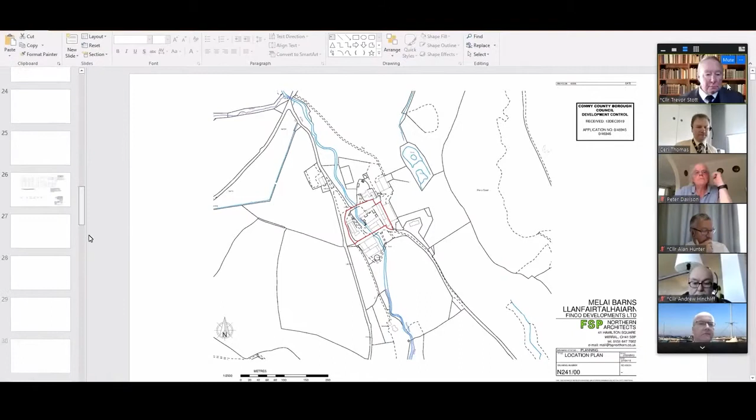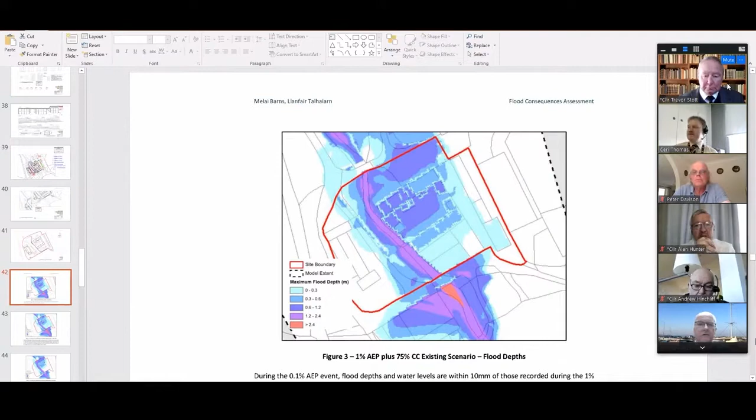Just to remind you, those mitigation measures would include constructing a flood wall along the right boundary of the stream. They would involve a slight increase in ground levels where the southeast access is required, and they would also include carrying out works to the bridge. Now, the works within the site could be secured by condition. However, the works to the bridge are outside the area of the planning application. They are not matters which can be essentially conditioned as part of this permission. They would require a separate permission from the council, and they would also need to be subject to the agreement of the highway authority. So there is some doubt as to whether the mitigation measures proposed in the flood consequences assessment can be achieved in their entirety.

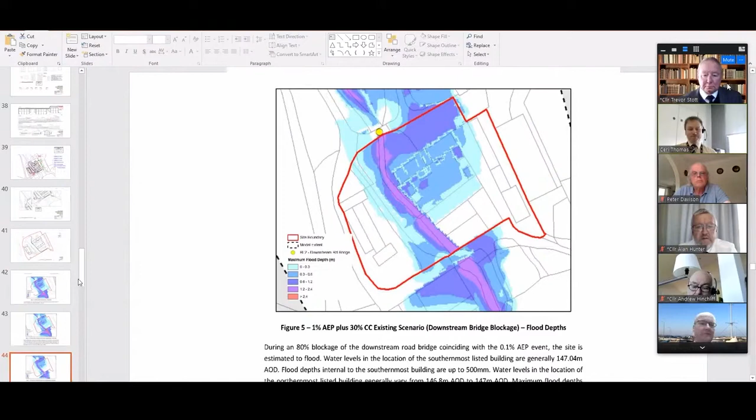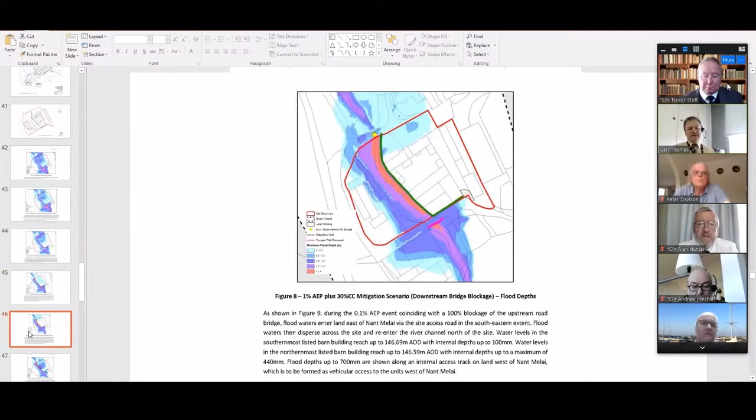If you could go to the next slide, please. This shows a similar situation, but with a blockage downstream of the bridge, again with the mitigation measures in place. In this case, there would be a lesser extent of flood risk. I'll just ask Julia to go to the next slide, please.

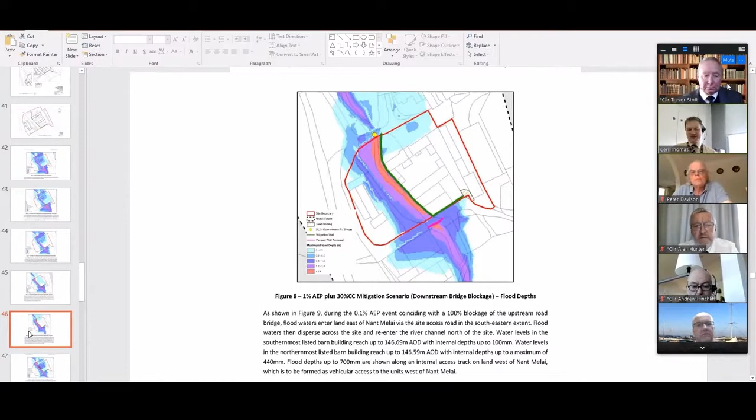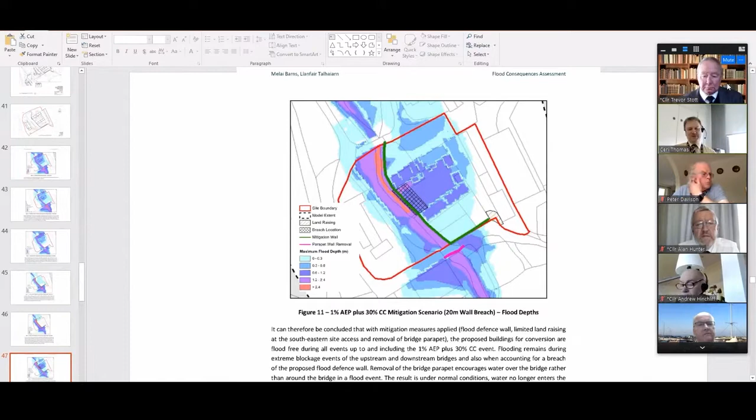We cannot recommend that the works on the bridge are secured by a Grampian condition, because the policy test for a Grampian condition is that we must be satisfied that there is at least a reasonable prospect that the works will be carried out before the rest of the planning permission can be implemented. And we're not in a position where we have that degree of confidence.

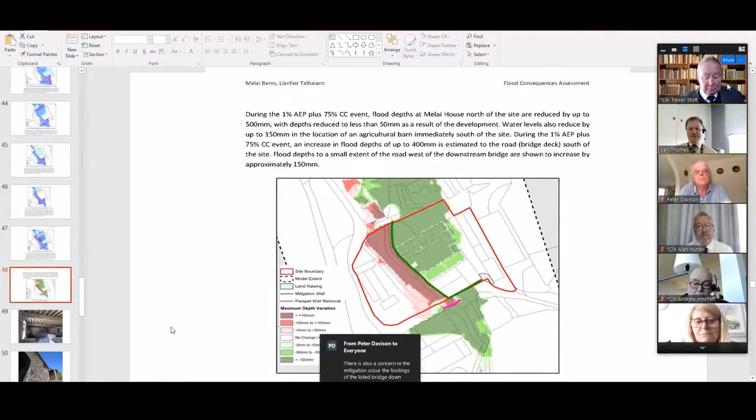This is a gem of a site, granted, and it's a lovely old building. But as if you're going to buy a house, what do they say? Location, location, location. If you're into water features, this would be ideal because you'd be in one for most of, for a better use of a word, I was there on the 9th of February last year in 3-4 foot of water, trying to help Mr. and Mrs. Williams, who live just the other side of this farm.

When this farm was sold, the house was sold separate to the buildings, and they've been trying to develop it. I think it was given consent prior to TAN 15 being implemented in 2012 for 6. Now that would have probably been developed, but they would have been flooded by now. This site will always flood, unless we're going to redirect the river, and I can't see anyone doing that soon. What mitigation they've put in place on the hydraulic modelling would work temporarily, but it will always flood.

And what hasn't been considered in these hydraulic assessments is also the water that comes off the mountain called Moel Unben down the Barog direction as well. The Barog being the catchment area that comes down, but more or less behind Colomendi, Peter Davison's property. So we have that problem with water always going to flood it.

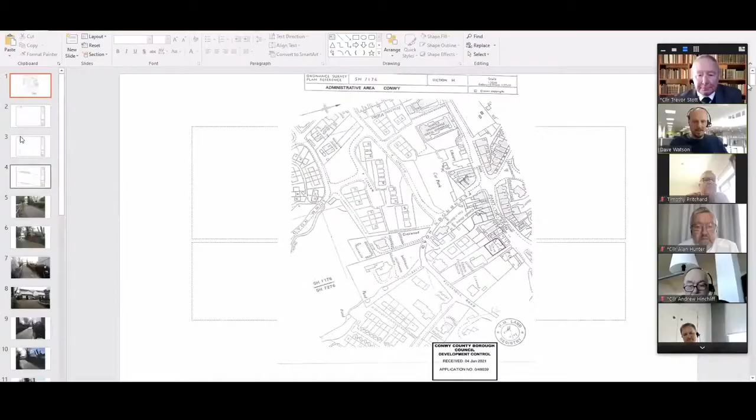That's the existing site plan, layout plan without the access. It shows trees 1, 2 and 3 alongside what is the eastern boundary of the site, but it's actually the bottom of the drawing that's shown there.

The next slide, please. This is the proposed site layout, which shows the driveway, parking area and the new access. Tree T3 would be the tree that would be removed, it's a sycamore tree. Just to remind members that the tree officer doesn't object to that tree removal.

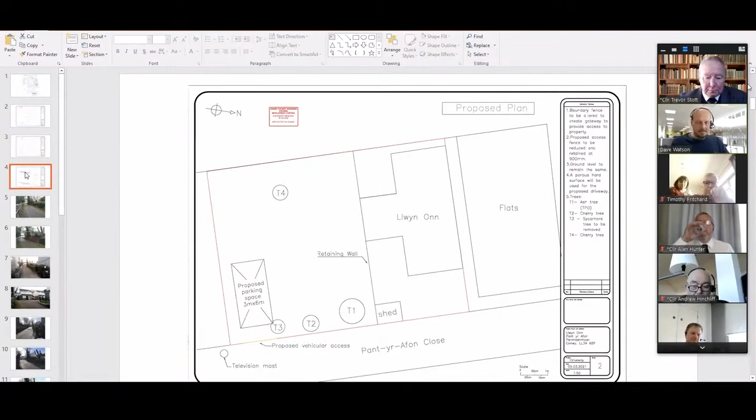Next slide, please. This is showing that there's an existing fence alongside the driveway, and that would be reduced in height to 900 millimeters, so lowered in height for visibility reasons as requested by the highway officer.

If you carry on through the slides, please. A closer view, keep going please. Keep going, that's okay. Okay, keep going, thank you.

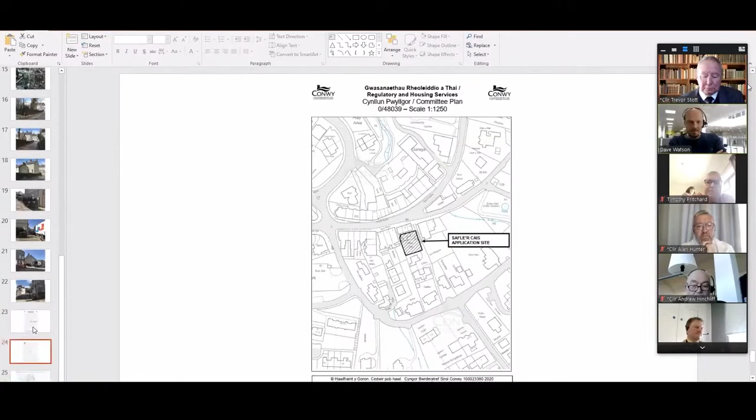So the objectors have referred to the committee plan as being inaccurate. It doesn't show very clearly in that drawing. Go to the next slide, please. And this is a land ownership plan from the adjoining property owner. And then the next slide, please, is another land registry plan that's submitted by the adjoining owner.

So, as I say, we're not able to adjudicate exactly where the ownership and the boundary line lies. It isn't a planning consideration. It's something which is a private matter between those parties. That's all I had to say. Thank you very much.

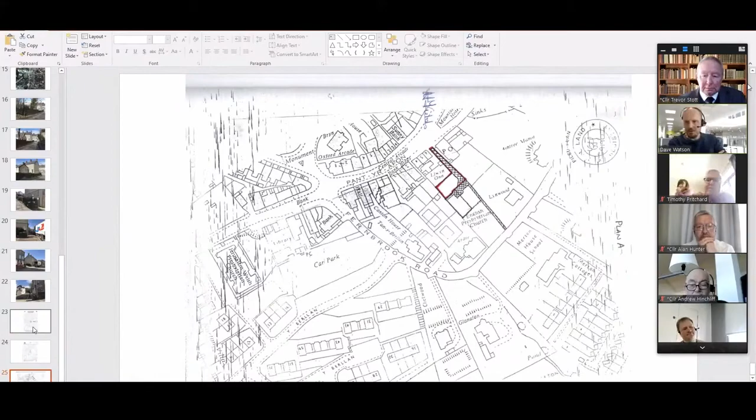Councillor Ken: Sure, yeah. Pant-yr-Afon Close is a little access lane basically for the three houses at the top. It's not really wide enough for two cars to pass, certainly not with the public footpath there.

I was interested in what was said about the car parking problems. Most of the problems with cars parking on that, at the other end of town, up by Spa - that's where the problems seem to occur.

This application seems to raise more questions actually than answers. Certainly we seem to be saying basically, okay, you can build this in your back garden, but how you get to it is up to you kind of thing, you know, it's your problem kind of thing.

That's what we seem to be saying now. I would rather think that the development building control manager will be the best person to talk about this, because there's still issues outstanding, aren't there? There are still issues to be dealt with. So I don't think we can determine it here today, actually. Thanks, Chair.

Thank you. Councillor Phil Capper. Councillor Phil: Thanks, Mr. Chairman. Could I ask Mr. Watson to confirm that land ownership is not a planning consideration, or is?

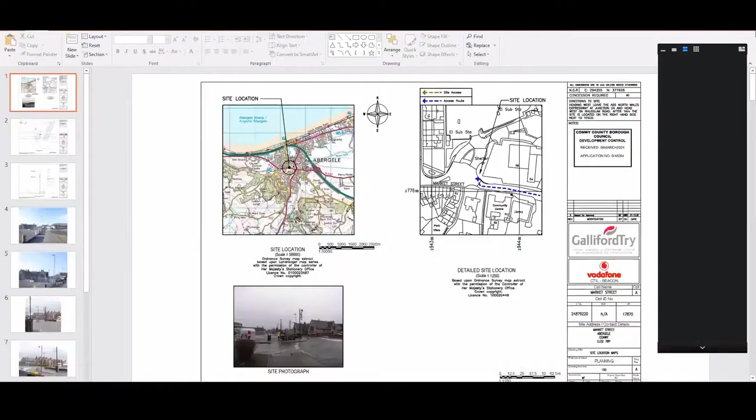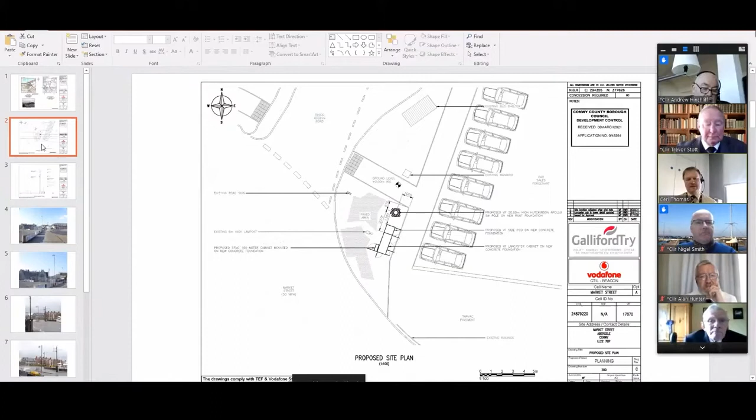If Julia could go down to the slide, if you could show slide 2 first of all. So this shows the location of the site, close to the roundabout, the Tesco roundabout on Market Street. On the right-hand side of the image, you can see where Slater's Garage used to be. If you could go to the next slide, please, Julia.